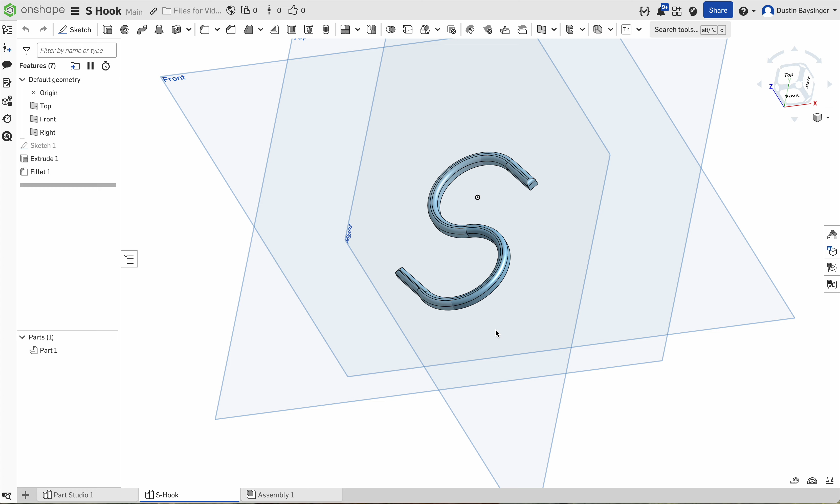Today we'll be creating a 3D printable S hook. You can see that it's rounded on the top but flat on the bottom, so we can print this on the print bed. The first thing that we're going to do is start a new part. We're going to go up to the top left-hand corner and start a sketch. Click on the top plane. We're going to right-click and view this normal to sketch plane, so we can see this in 2D.

Then we're going to create 4 circles, right here. Another circle concentric with the first. And then we're going to do the same thing on the bottom right here. The second one's going to be concentric with the third.

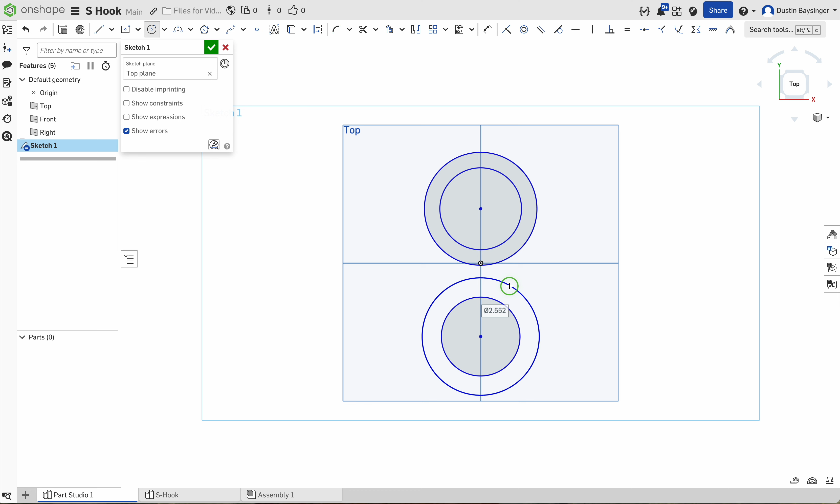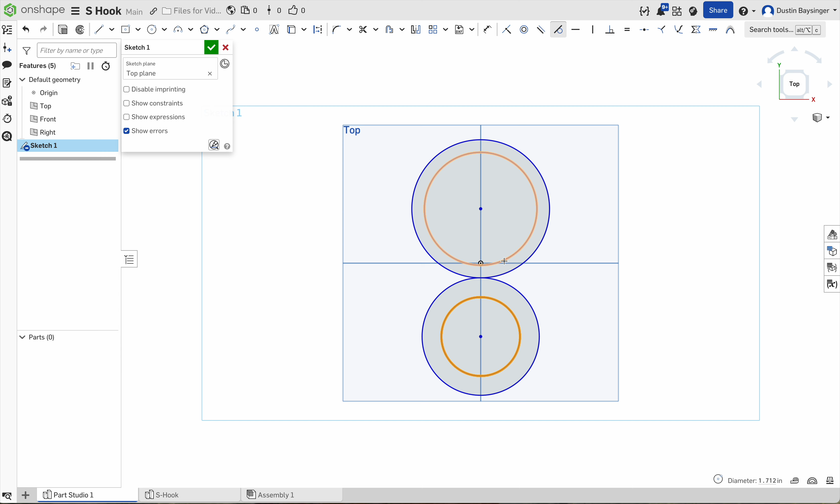Then we're going to apply some constraints. We're going to use the tangent up here in the top middle. And we're going to constrain the outside circle with the inside circle right here. And we're going to do the same thing with the inside circle to the, well, it was outside, but now it's inside right here.

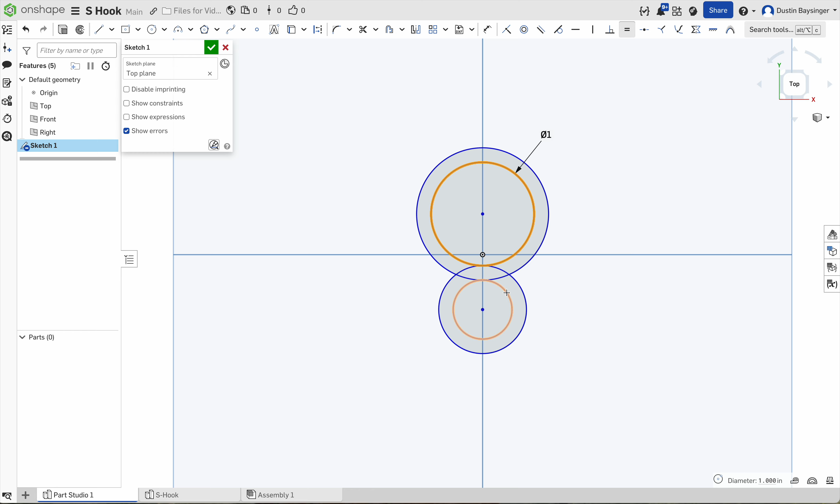Then the pipe that we're going to use on our S hook is going to be 3/4 of an inch. So we'll make the inner diameter of our S hook 1 inch to make it easy. We'll do 1 inch right there. And then we don't want to sit here and dimension everything twice, so why don't we constrain it instead? So we'll go up to our equal sign here, and we'll just make the inside circle equal to that on both of them. And we might as well do that with the outside circle as well, because, why not?

Now we're going to dimension the outside circle, or, whoa, looks like our inside circle became our outside circle right there. So let's fix that. And all I did is pull one circle onto the outside. We're going to dimension, and I'm going to use the dimension feature right here, but most of the time I just press D in order to complete that. You can kind of see that when I press D, my mouse goes from a cursor to a cross like that.

The outside diameter that we're going to need is 1.25 inches. And that's to essentially make 1/8 of an inch of material on this side and 1/8 of an inch of material on this side. So everything's similar. And that's about what I use for thickness on most 3D prints.

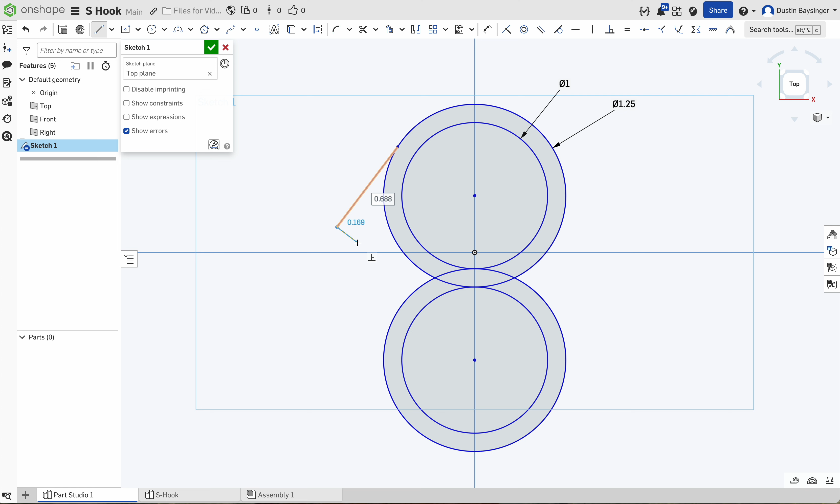Next, we're going to want to make the straight part of the S hook. So let's create 3 lines coming off the circles. And the first line will be connected to the outside circle right here, and the third will be connected to that one. And we're going to want to do the same thing for the bottom circles. Kind of trying to frame out our S right here.

And we're going to want all these to be perpendicular with each other. And that'll kind of round out the thickness of this as well. So that'll be perpendicular to that. That'll be perpendicular to that. Same thing here. Make this perpendicular as well. So now you can see it kind of sized down to 1/8 of an inch, right? So if we dimension that, almost 1/8 of an inch. We'll fix that in a second.

Let's go back with our tangent constraint, and we're going to make this line tangent to the circle, and this line tangent to that circle. So it smoothly comes off the S right here. And we're going to do the same thing for the bottom as well. So tangent to the inside. And then we want this to come off the circle at a 45-degree angle whenever it hits that on the circle. So let's go back to our dimension.

Oh, sorry. We're going to have to dimension this off of something, right? So let's create a construction line. And you can make a construction line by using this feature right here. You click on the line and then construction. And we're going to have a line come off that point right there. We want to make sure this is constrained horizontally, right? And you can see that by the horizontal line that comes up next to my cursor right there.

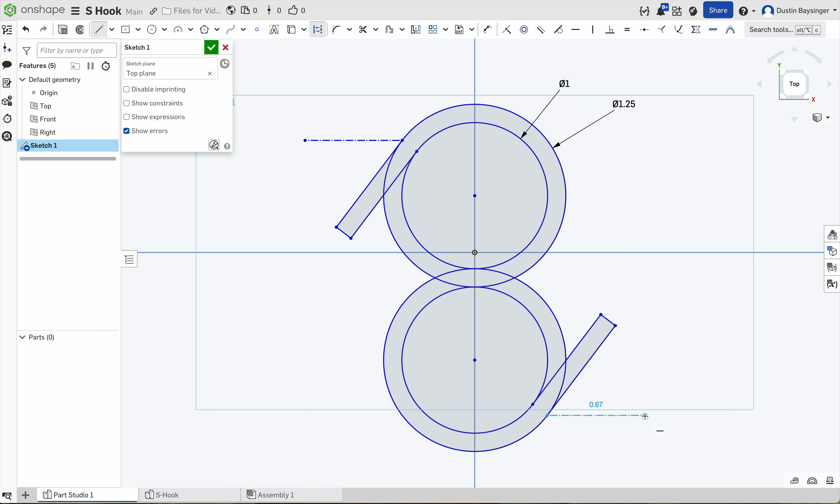And we're going to do the same thing on the bottom right here too. So line, construction, and we want to make sure that's horizontal. And then just press escape to get out of that. Now we're going to dimension from that line and then to this line. And let's make that 45 degrees. And then we're going to do the same thing on the top right here. Oh, it looks like it already made it to 45 degrees for us.

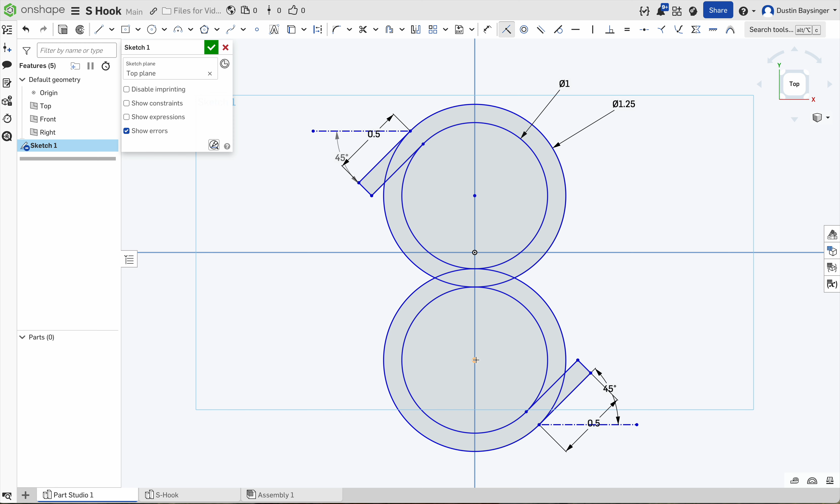Okay, so this line, let's not make it 0.77. Let's do 0.5 instead. 0.77 seems a little too big. So 0.5. And then it looks like everything here is not constrained yet, but let's make this coincident with the origin and see if that doesn't fix that. Yeah, that looks like everything went from blue to black, so that means it's all constrained, except for these lines, of course. Then we could always add a dimension to it if we really wanted to, and that'll constrain it.

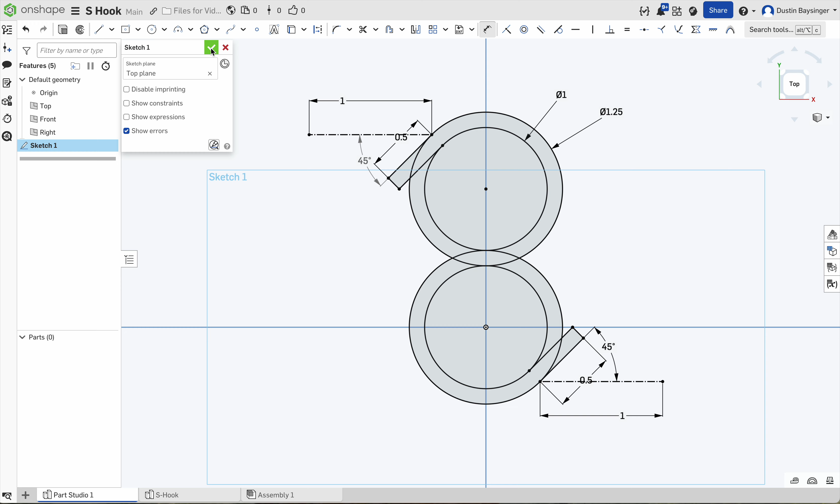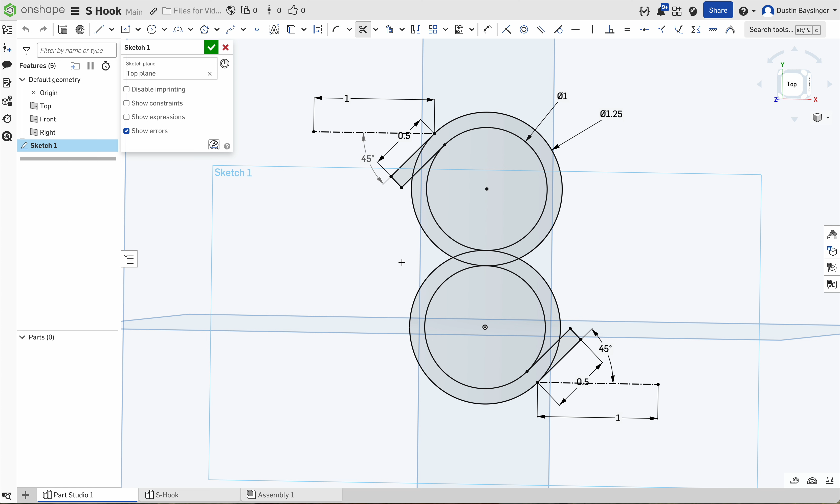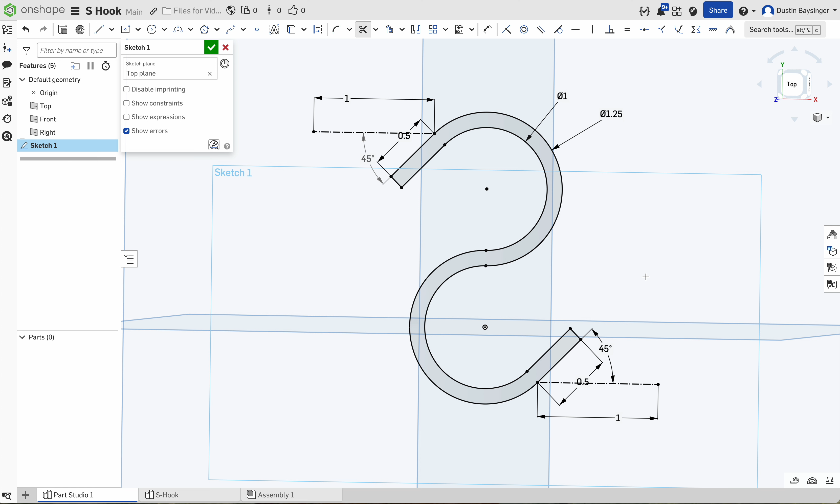So, okay, let's press the check mark on our sketch. We're gonna have to do a lot of clicking to extrude this, so why don't we go back to the sketch, actually. And let's trim up a bunch of these lines that we don't really need. So let's go to the trim feature right here, and let's create an S by getting rid of some of these lines for the circle. I'm going to kind of stay away from the center right here until we get a picture of our S. So let's do these two lines right here, the line in here, and then get rid of this one and this one. And that looks like our S right there. It looks like it's still constrained as well, so that's good.

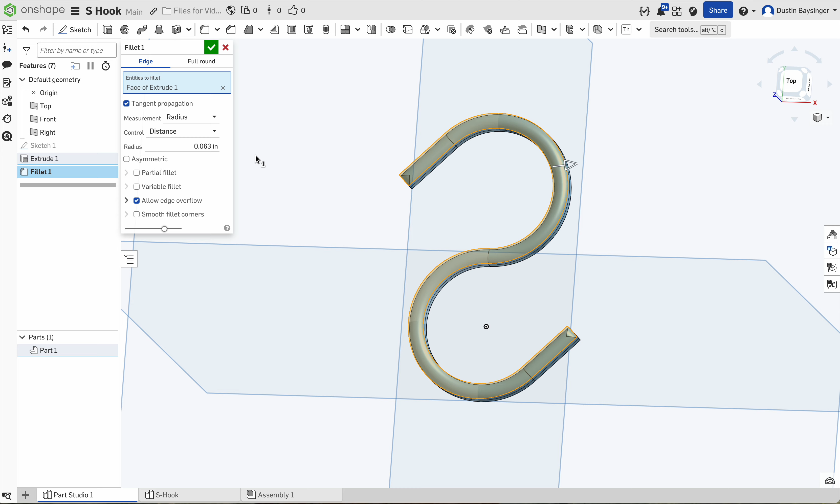Press the check mark. We're going to extrude this. Instead of an inch, it's going to be 1/8 of an inch. Press OK. And then we're going to add our fillets to the top. And that's going to be 1/16 of an inch right there. And that'll be our S hook.